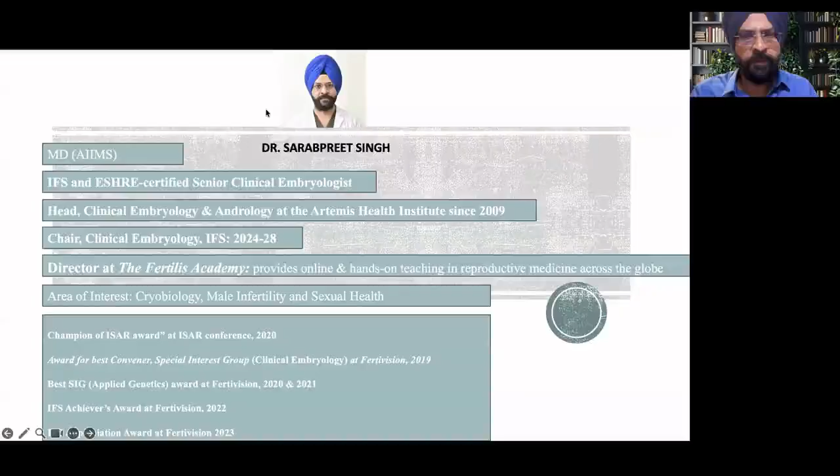To introduce the subject, IVF is a highly complex, multi-step procedure with a cascade of biochemical and molecular intracellular signaling for embryonic development. This outcome is affected by clinical factors such as stimulation, oocyte retrieval, and embryo transfer, as well as environmental factors such as temperature, oxygen, and CO2 control. There is significant change in the microenvironment which affects oocyte and embryonic metabolism and homeostasis, and even a minor change will have a profound effect on embryonic outcome and implantation rates.

The embryo doesn't have a liver, kidney, lungs, or nose to detoxify itself. So you have to feed the embryo with the right kind of nutrients, whether air, macro, or micromolecules. Environmental and air pathogens play a significant role in embryogenesis and implantation. The gametes also require protection from toxic substances such as volatile organic compounds and chemically active compounds.

Sources of air contamination can be either external or internal. External sources include pollution from surrounding areas, nearby buildings, petrol pumps, malls, busy traffic roads, or industry operating near the IVF center, or exhaust from cars and trucks. Those are the main common external contaminants.

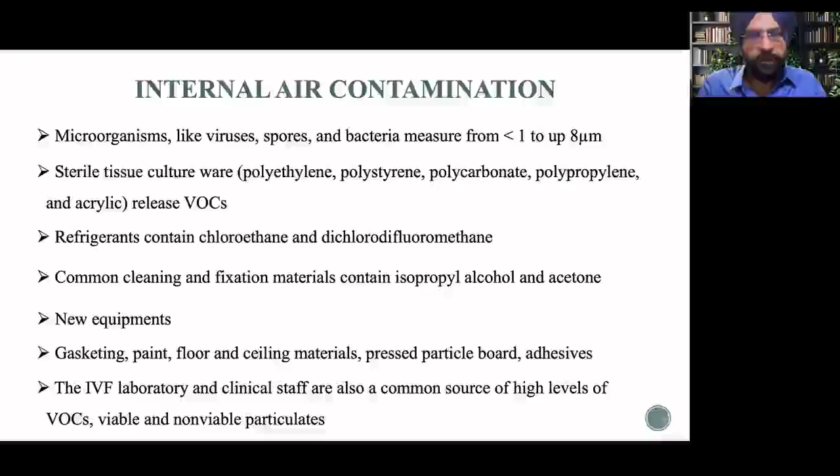Also, the lab staff coming in—clinical staff, nurses, co-embryologists, technical staff—should change into clean scrubs, and should not smoke before coming in or wear perfumes. Everything has to be avoided. Air quality has to be optimal in order to get great results.

If you look at air filtration, there are three different stages. The first is the coarse stage or pre-filter stage, in which pre-filters are usually broad gauge filters which are inexpensive. They filter large particles and provide initial contamination control.

The large particles get stuck to the pre-filters, and thereby the large particles are filtered first, so they cannot impact the fine filters which are subsequently in the series. The first filter is always the pre-filter. The second filter is usually a fine filter which removes fine particles after the big particles are taken care of by the pre-filter. The combination of first and second stage filtration allows filtered air to reach the HEPA filters at an optimal cleanliness grade. The method used to assess the saturation of fine dust filters is by assessing the pressure drop across the filters.

The third stage filtration is usually the HEPA filter, or high efficiency particulate filter, which is responsible for removing the smaller particles. HEPA filters are generally essential for clean room classification, and their saturation is assessed by pressure drop. HEPA filters generally filter particles which are above 0.3 microns.

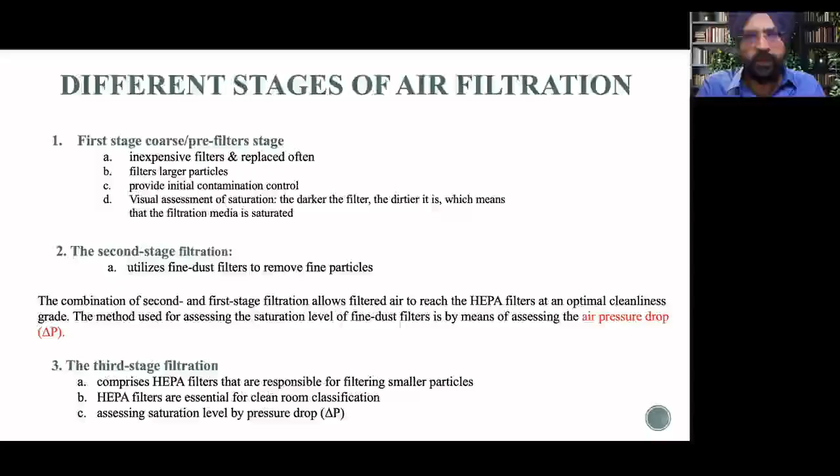Now we'll come into the details of how the filters work. The types of filters are: pre-filters, which filter particles greater than 10 microns; fine and medium filters, which take care of particles more than 1 micron; HEPA filters, which are very effective for any particle greater than 0.3 microns; and ULPA filters, or ultra filters, which filter particles greater than 0.12 microns.

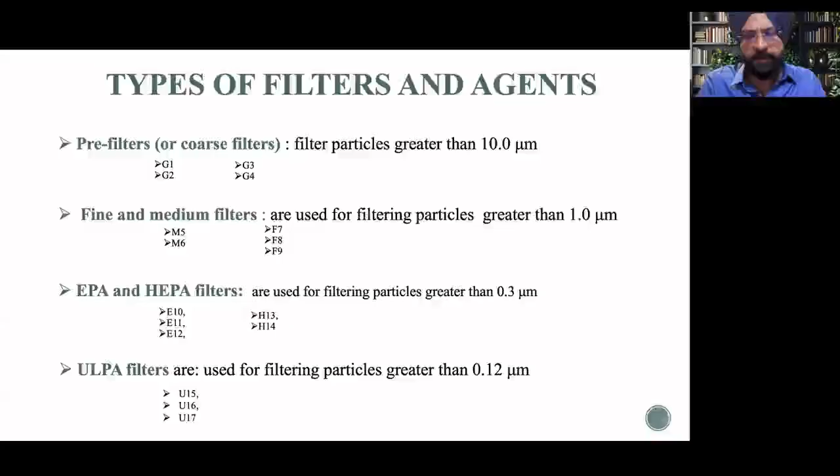So how do HEPA filters work? There are just four mechanisms of particle trapping: diffusion, impaction, interception, and sieving. There's no need to go into the details. Only thing you need to understand is that any particle less than 0.1 micron will get stuck due to diffusion. Any particle more than 0.4 micron will be intercepted and impacted in the substance of the filter material.

The problem is with 0.1 to 0.4 micron particles. These are too large for effective diffusion and too small for inertial impaction and efficient interception, so this decreases the filter's efficiency. The critical range, the 0.3 micron, is the global efficiency point, which represents the hardest particles to capture. Anything less than 0.1 is easily trapped, more than 0.4 is easily trapped, but somewhere in the range of 0.1 to 0.4, especially 0.3 microns, it is the most difficult to trap. And most of the pathogens will be in that range.

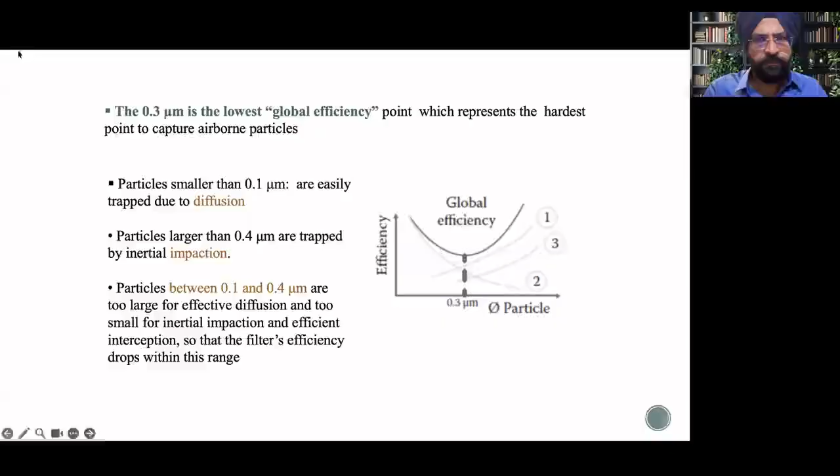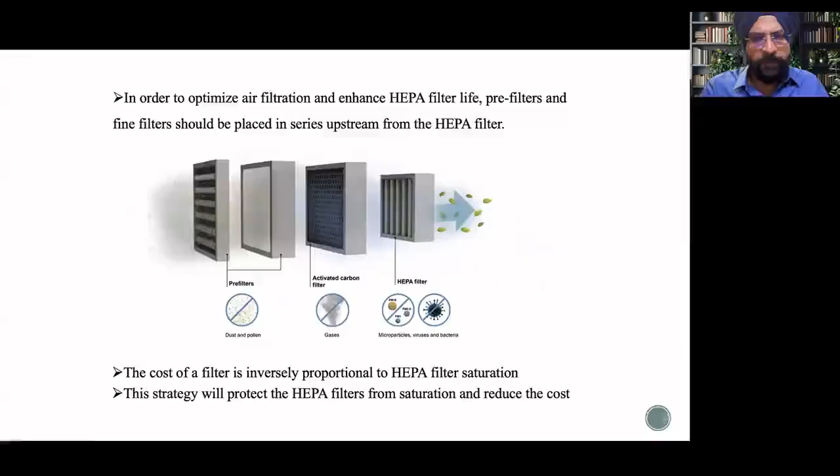If you look at the activated carbon filters, which is the second stage filtration after the pre-filters and fine filters, they generally take care of all the CO2, alcohols, aldehydes — all the volatile organic compounds are taken care of by the activated carbon filters. You also require oxidizing media, which is beneficial in conditions having high aldehyde concentrations. Generally, the oxidizing media is alumina. It acts as a carrier for oxidizing media such as potassium permanganate. It's porous and highly adsorptive, so alumina is something which will absorb VOCs and toxic gases.

These media bind gases which are then chemically broken down by oxidation. For systems that use activated carbon, potassium permanganate reduces the level of oxidation reduction reagents that could also cause problems for culture. So it's a combination filter — usually it has activated carbon as well as potassium permanganate. Potassium permanganate is more of an oxidation agent, and carbon is more of an adsorptive agent for volatile organic compounds.

Another important filtration step is ultraviolet germicidal disinfection. As I told you in the previous slide, HEPA filter efficiency decreases in the critical range of 0.2 to 0.4 microns, and most undesirable microorganisms are in this range, around 0.1 to 0.5 microns. To take care of these, we require additional UV germicidal irradiation. The most effective is the UVC band, which is between 280 to 200 nanometers, achieving the most effective germicidal effect.

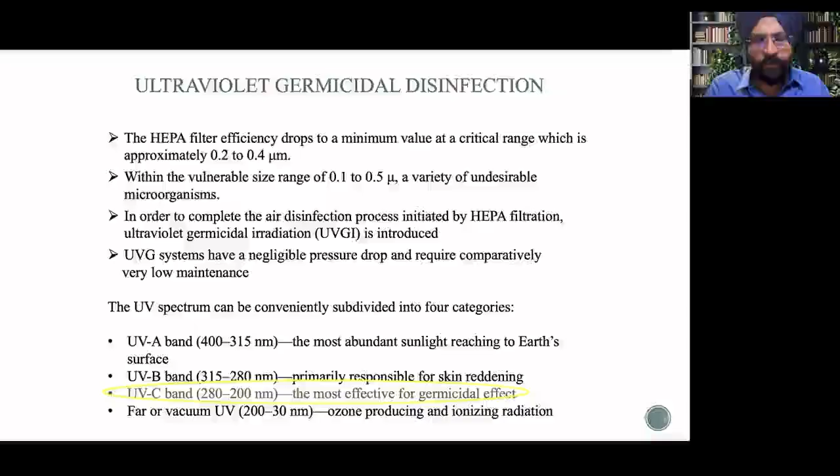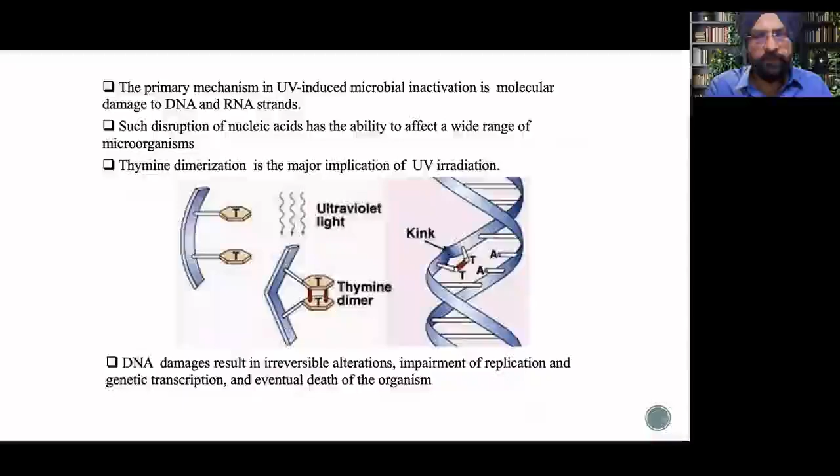So these are part of the filter complex which we generally use. If you look at the primary mechanism by which UV radiation kills or is effective on microorganisms, that is thymine dimerization.

So now the question is, which filter system should you choose for your lab? It depends on the air cleanliness class to be achieved, because there are different classes of cleanliness which we'll go on to discuss in subsequent slides.

Just one second, just one second. I'm joining from the other computer. This computer is giving me some problems. Just one second.

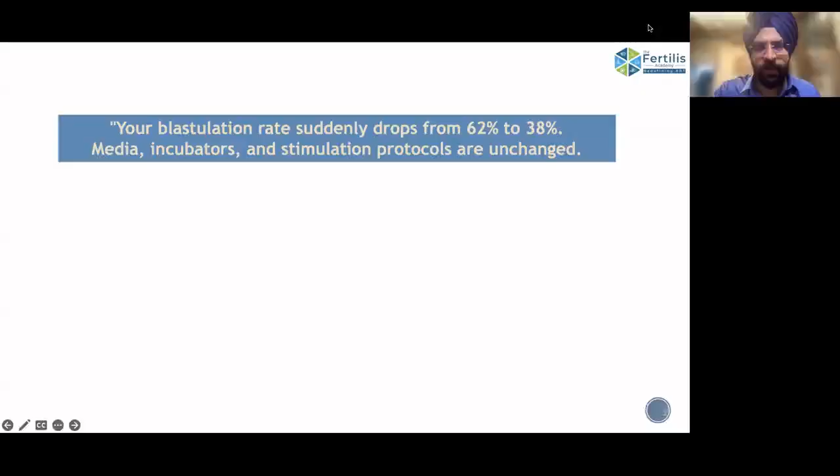So we'll start with a clinical case. Your blastulation rate suddenly drops from 62% to 38%. Everything in the lab is unchanged. So what can be the reason?

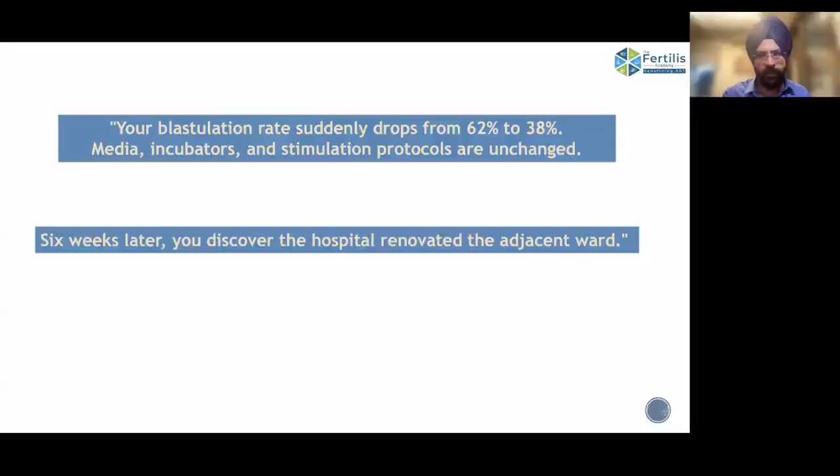And six weeks later, you discover that the hospital has renovated the adjacent ward. There is some construction activity in the adjacent ward, and they have used sealants and adhesives, which can lead to disturbance of air quality in your IVF unit. So the question is, could the air be responsible?

So as we've gone through this slide, IVF is a very complex procedure with clinical and environmental factors, and any small change in the microenvironment will grievously affect embryonic development.

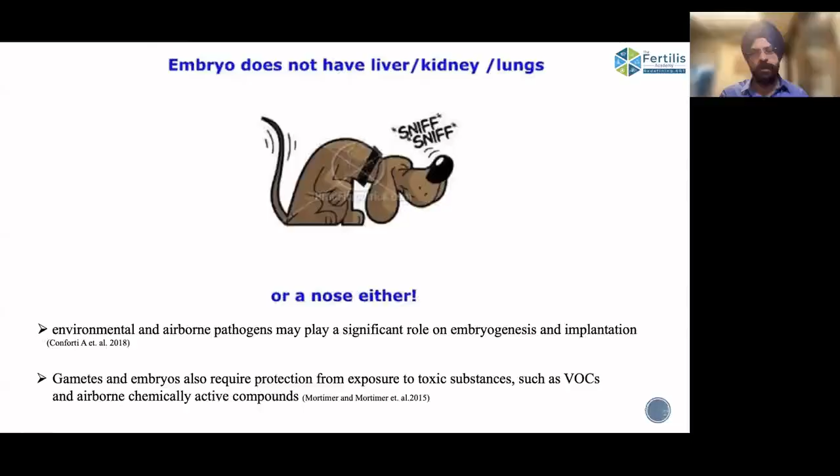With that background, we've also studied that embryos can't detoxify, so you have to give them very pure and quality air. If you look at external sources, there is construction, and pollution sources such as petrol pumps, construction, etc.

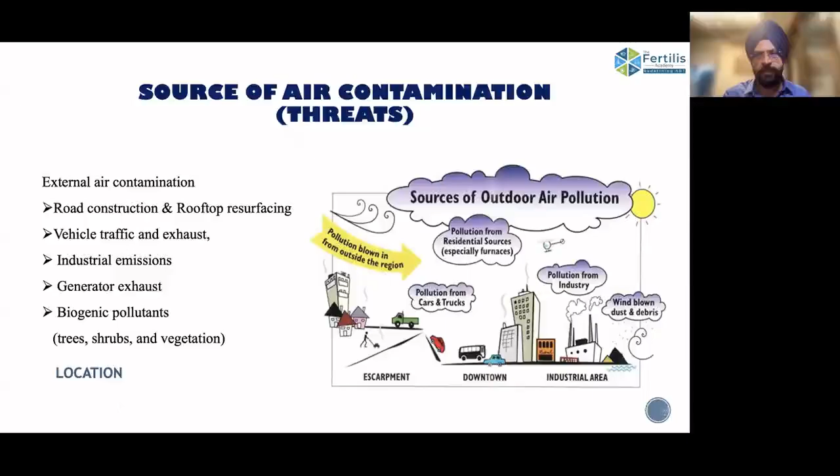If you look at internal sources, these are even more relevant because this is something you can control. People come in with perfumes, hand sanitizers, dirty clothing, plasticware in the lab, paint, adhesives, and equipment such as refrigerants — they do emit VOCs like CFCs, etc.

Any new incubators outgas, as do any new machines. And HVACs — heating, ventilation, and air conditioning units — if not properly maintained, can themselves be a source of poor quality air.

So what is the biological mechanism for damage or decreasing the outcome? Poor quality air will lead to VOC exposure, oxidative stress, mitochondrial dysfunction, DNA damage, and epigenetic alterations in the embryos. This will lead to reduced blastocyst development, lower implantation rates, and reduced live birth rates.

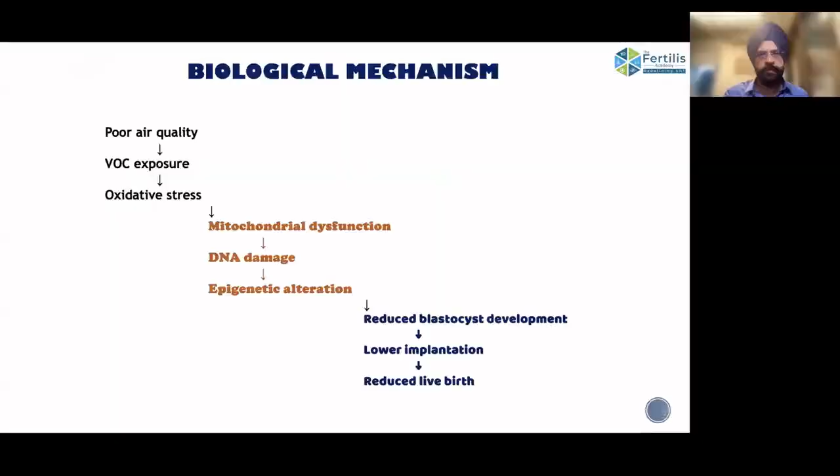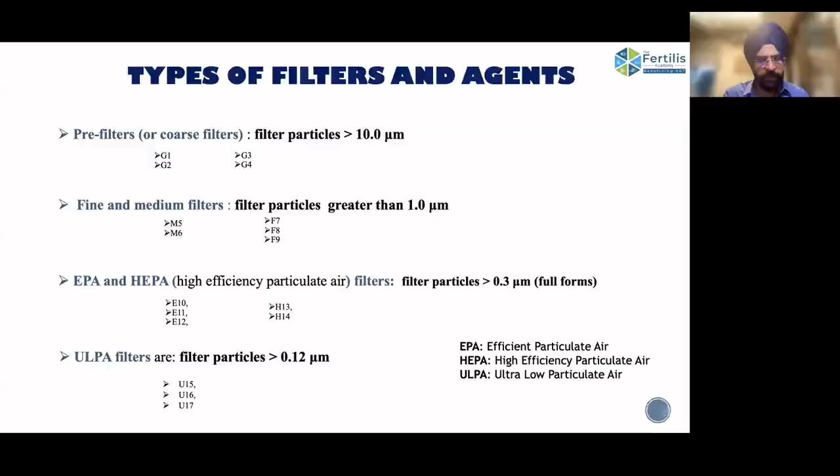This is the mechanism which should be at your fingertips when explaining about air quality. And on air filtration, I told you about the pre-filters, fine filters, efficient particulate air filters, and high efficiency particulate air filters, so we'll not go over it again.

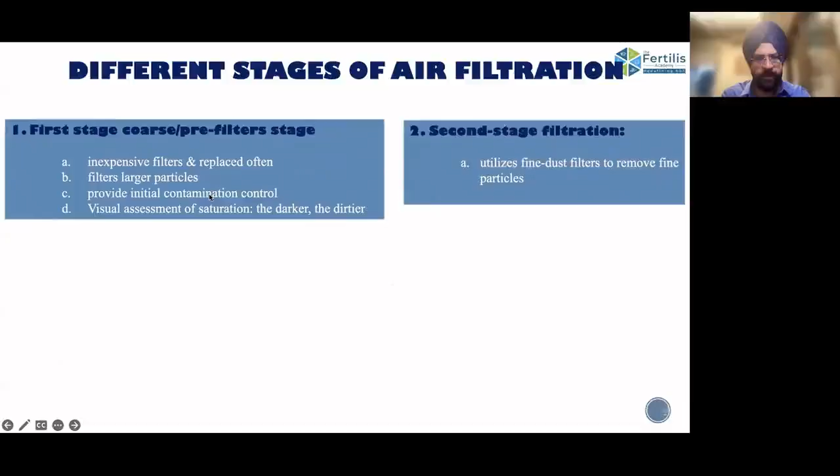You know the different stages: the first stage is only the pre-filter stage, the second stage is the fine filter stage, and the third filter is the HEPA filter stage. We have to take care of providing filtered air to the HEPA filter, because otherwise the HEPA filter will get impacted and jammed.

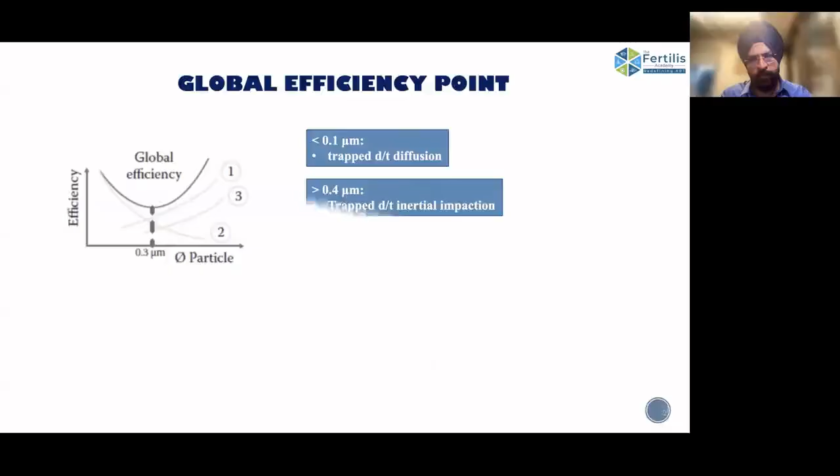So the four mechanisms of particle trapping are diffusion, inertial impaction, interception, and sieving, as we told you. And for global efficiency, you know it's between 0.1 to 0.4 microns, with 0.3 being the mean. Anything less than 0.1 is trapped, and anything more than 0.4 is again trapped. Anything between 0.1 to 0.4 is critical and it's difficult to intercept.

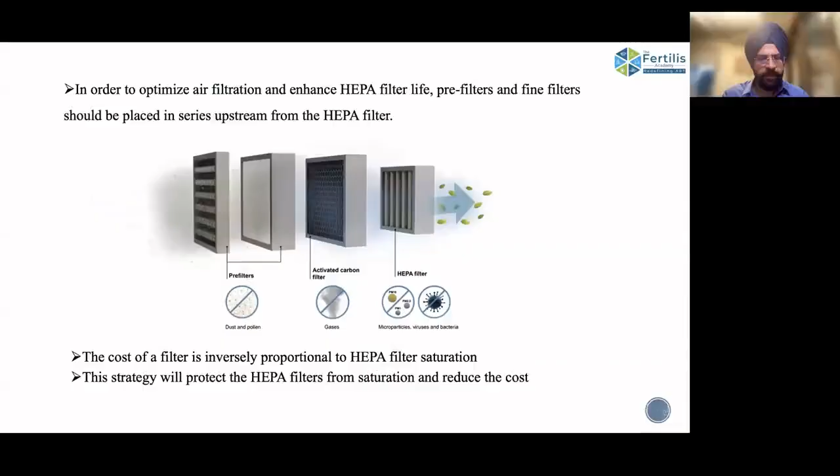So the series of filters is pre-filter, activated carbon, and HEPA filter. Looking at the activated carbon filter, the size and type of filters should be designed for IVF labs with air volume providing sufficient turnover rate and exposure time to the carbon filter to remove VOCs from the room air.

So oxidizing media, as I told you, takes care of the high aldehyde concentration in the environment. Alumina generally acts as a carrier for oxidizing agents — it's porous and highly absorptive, and it binds gases.

For systems that use activated carbon, KMnO4 or potassium permanganate reduces the level of oxidation-reduction reagents, which could be a problem for cultures. So they are used in combination — activated carbon and KMnO4.

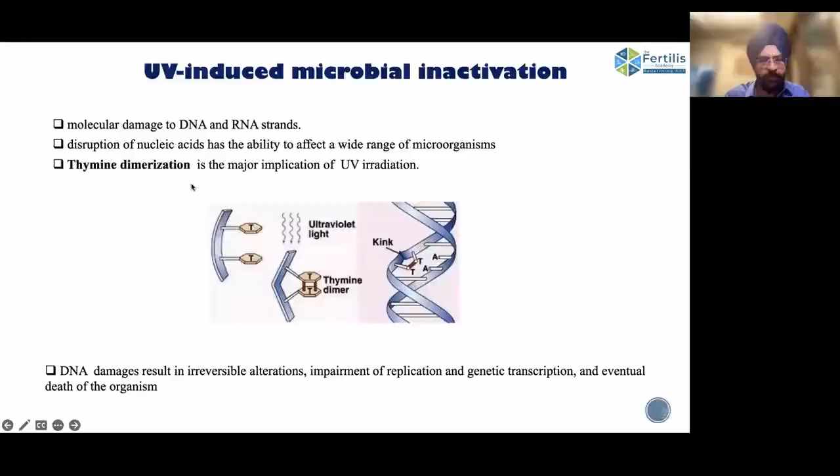Looking at ultraviolet germicidal disinfection, I told you that the UVC band is the most effective for germicidal effect, and generally thymine dimerization is the major implication of UV radiation, which kills the microorganisms.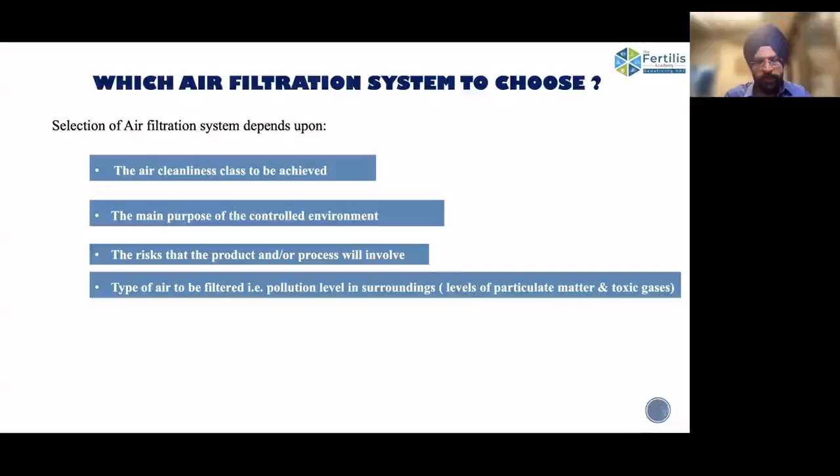Now, which air filter to choose? It depends on what kind of air quality you are trying to achieve, the main purpose of the controlled environment, the risk that the product or process will involve, the type of air to be filtered - that is, it depends on the pollution level in the surroundings. Also, the size and type of filters should be designed in proportion to the lab air volume.

This provides sufficient turnover rate and exposure time to the carbon filter so that it can easily remove the VOCs from the room air. The most critical and silent killers are the VOCs, or volatile organic compounds. Particulates you will take care of with the help of HEPA filters.

Also, the budget which is to be invested in air filtration has to be considered, because there are many kinds of air filtration systems which we will discuss in subsequent slides, and the cost is also a major concern.

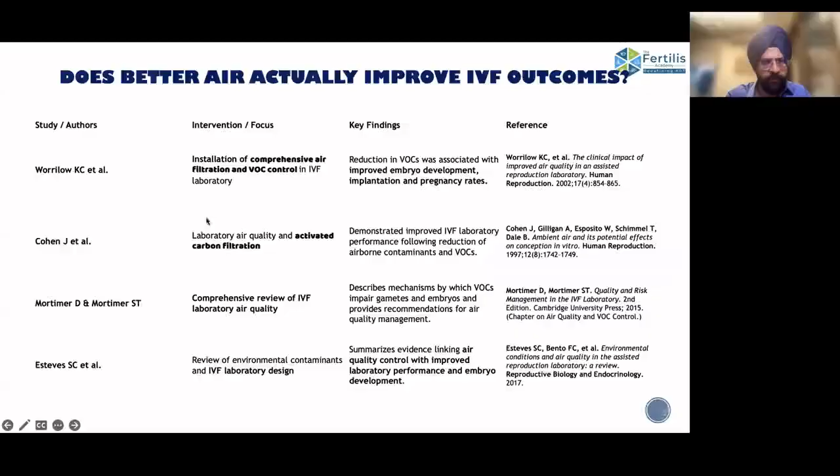Many studies have shown that if you improve the air quality, the implantation rates and the embryo development improves. These are some of them. You can take a picture of this, you can take a screenshot.

So what are the benchmarks for an IVF lab in terms of air quality? The benchmark is there should not be more than 3.5 lakh 0.5 to 5 micron particles. This condition applies during operation as well as during rest. So the air quality should be grade B in operation and grade C at rest.

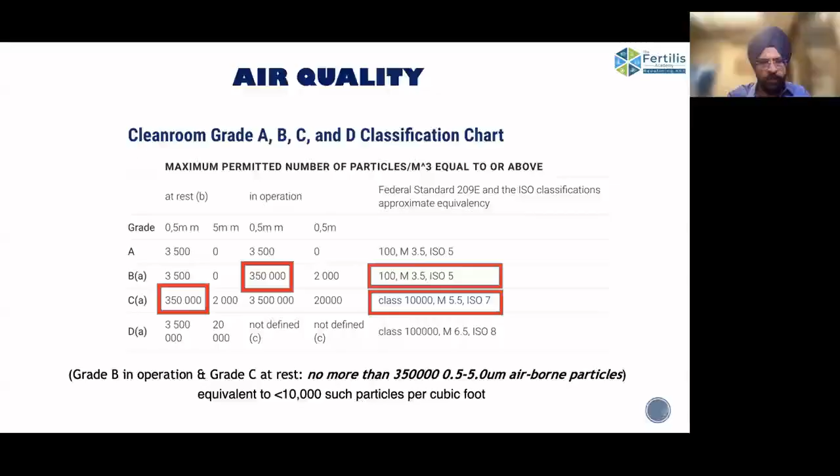So anything which is class 10,000 in the ambient environment will be able to support class 100 in the laminar hood. If your ambient air is not clear and good, you will never be able to achieve the right air quality in the laminar hood. So keep your lab clean. Don't trust your laminar hoods in case you're not feeding them with the correct air.

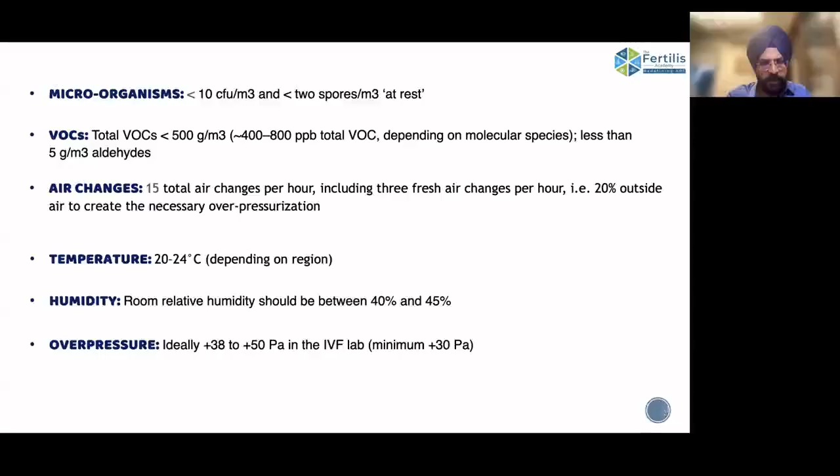So the international norms for microorganisms should be less than 10 colony forming units. VOCs should be less than 500 grams per meter cube. Air changes at least 15 to 20 per hour, with at least 20% outside air, which is required for necessary overpressurization. Temperature 20 to 24 degrees depending on the region. Humidity should be maintained between 40 to 45%. And overpressure of at least 38 to 50 pascals, minimum 30 pascals.

But honestly, we have tried using 30 pascals - it becomes too much. Anything between 10 to 15 is a more practical solution. This is my own experience in my lab.

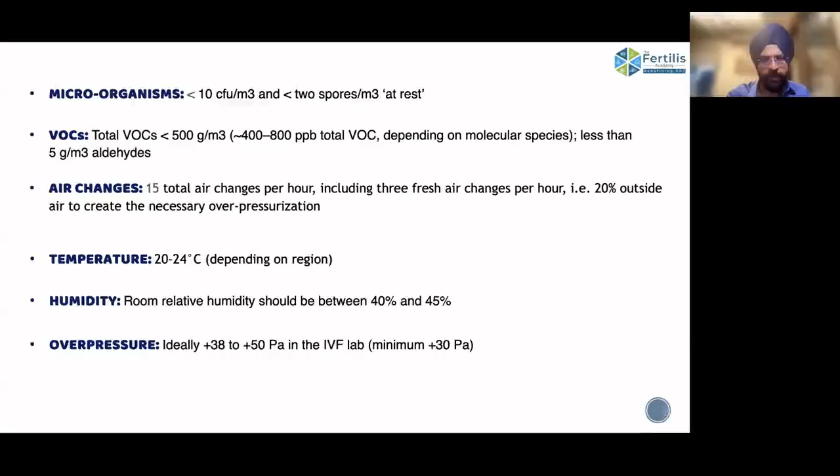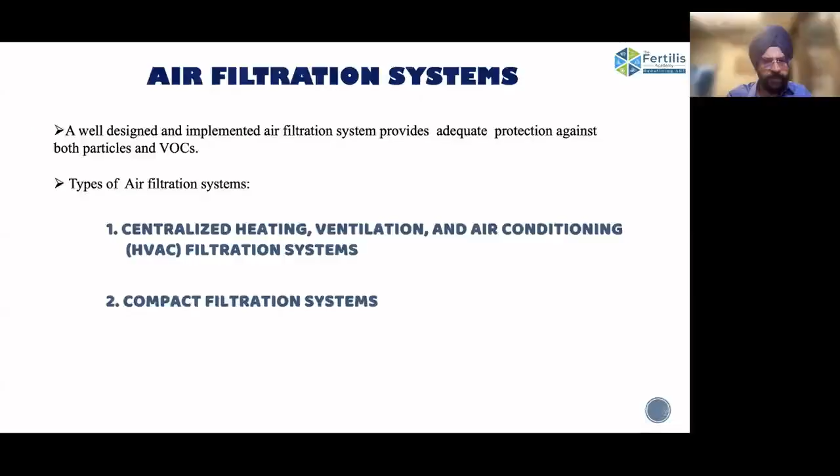And we can achieve all this with the help of different air filtration systems. Number one being centralized heating, ventilation and air conditioning systems, or HVAC units - most expensive and most efficient. Then we've got the compact filtration systems. And we have got portable filtration systems, like they are similar to what we use in our homes in North India because of high pollution in winters.

So we will be discussing all the filtration systems. The HVAC systems combine adequate supplies of pressurized airflow with temperature and humidity control. So this is the chief feature: pressure control, temperature control, humidity control.

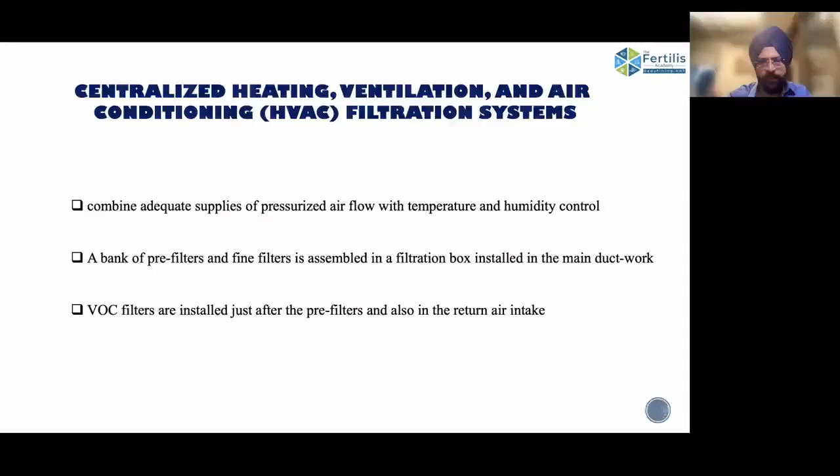There is a series of pre-filters and fine filters in a filtration box. The VOC filters are installed next to the pre-filters, and then the activated carbon filters and KMnO4 filters which take care of VOCs. And at the last, you have the HEPA filters.

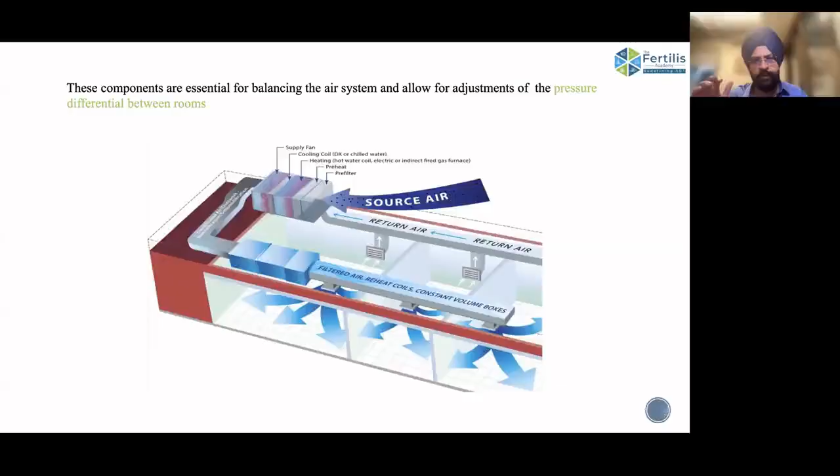And for each room, you require different HVACs at different pressure settings. So if you have a higher pressure HVAC in the lab, you should have a lower pressure HVAC in the OT, so that the air flows from lab to OT, and the OT should be a little higher compared to outside. Then the airflow is from lab, to OT, to outside.

Now talking about the compact filtration systems, they are known as bag-in and bag-out filtration systems. They are ideal for low budget facilities with a maximum room size of 20 meters square, around 200 to 230 square feet.

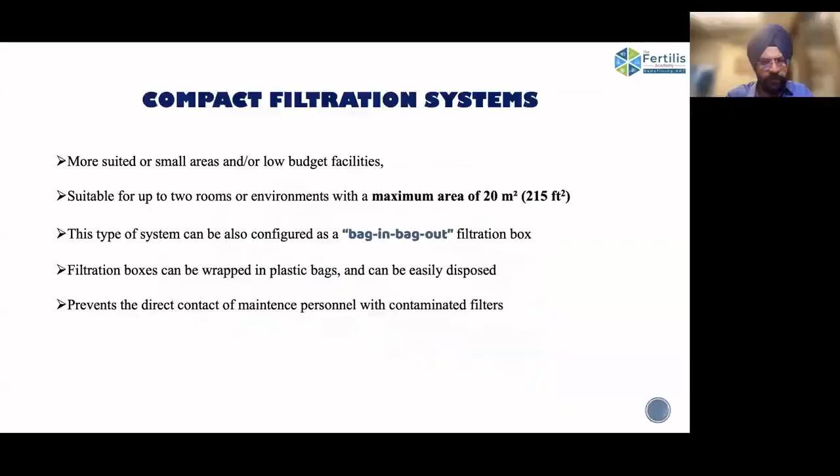If you look at these filter systems, they are usually installed in the adjacent room, and they throw in clean filtered air into the IVF lab. The filter box is a combination of pre-filters, HEPA filters, and most filter boxes will also have activated carbon filters. They provide high filtration rates and high speed airflow, decent temperature and humidity control, but the pressure differential they claim to provide is not as effective as the HVAC system.

Now this is a very common example of what we get in our country. This is a lab guard. If you look at the design, the lab guard is throwing in filtered air. This is the room next to the IVF unit, and this is the IVF unit. The lab guard will throw in filtered air which circulates in the IVF lab, and through a return blower, this comes back to the adjacent utility room.

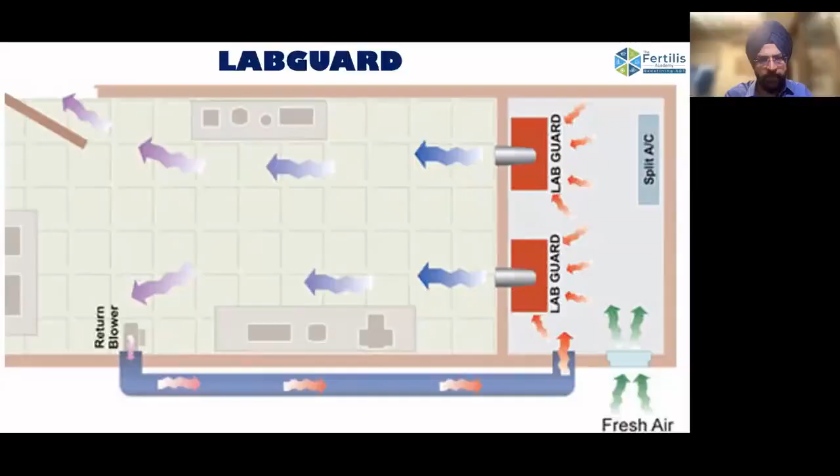The important feature which people generally miss is that there is a supply of fresh air which is absolutely essential to detoxify the air. Otherwise recirculation will go on pumping in contaminated air. The split AC is usually installed in the utility room or adjacent room, because the cold unfiltered air goes in through the lab guard, and it not only cools the IVF unit, it also provides filtered air at a slightly higher pressure compared to normal. A reasonable arrangement to get decent results.

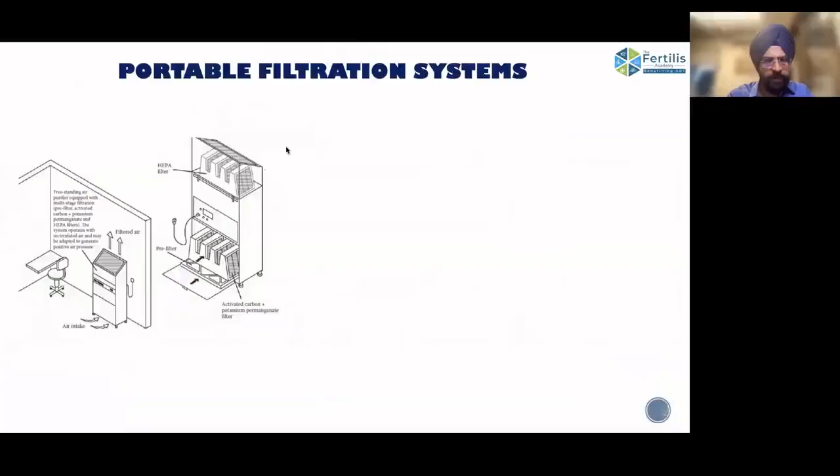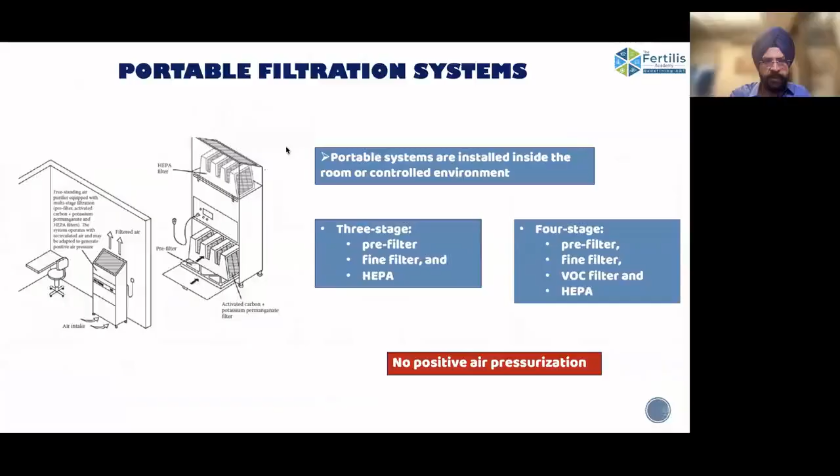If you look at the portable filtration system, they are more or less what we use in our homes. This is again either a three-stage system of pre-filter, fine filter, HEPA filter, or it can be four-stage: pre-filter, fine filter, carbon filter, and HEPA filter. There is no positive pressurization, it just goes on recirculating air, and at some point the filters will clog and you have to replace them.

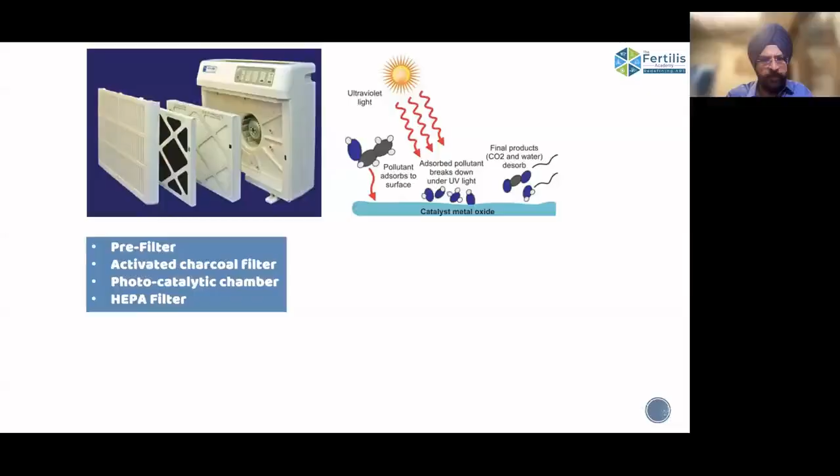This is another example of a portable system, Zandair or Coda filter, whatever you may call it. Same kind of arrangement, so we are not discussing this again. No temperature or humidity control, no pressurization.

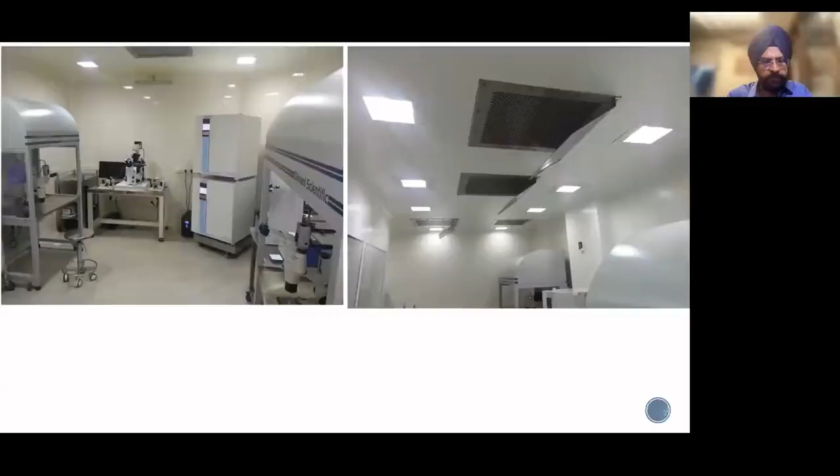This is an example of a lab in which there is a centrally placed HEPA filter through which air is entering into the lab. And this is kind of a correct arrangement.

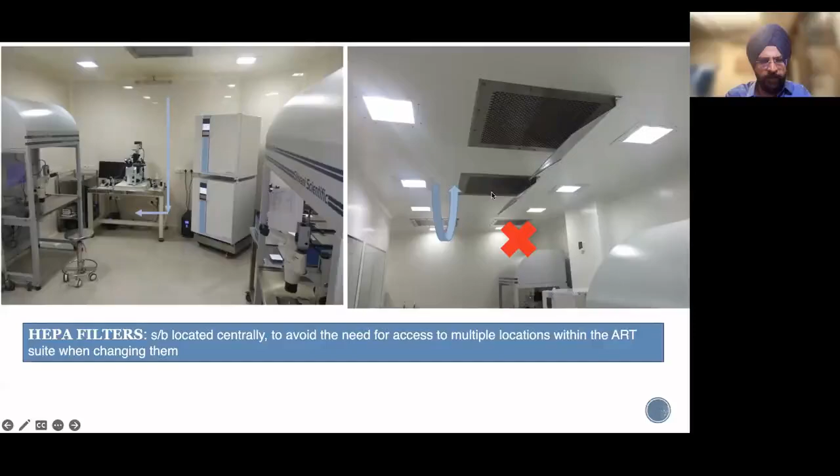If you look at this lab, it has got various HEPA filters, maybe three HEPA filters in the same lab, which will be difficult for achieving the right pressurization in such an arrangement. Moreover, the cold filtered air will fall on the instruments if you have multiple vents in the lab, and it will disturb the conditions of the incubators. So placement of HEPA filters should be central and not multiple locations, because it will create cold spots and hot spots in the lab, and especially the inlet and outlet should be nicely located.

Look at this lab. The inlet is from the top and the outlet is at the walls. Whereas in this lab, the inlet is on top, as well as the return duct is again on the ceiling, so the circulation is not laminar in any way.

So when we talk about clean rooms and air quality, it should be pressurized using HEPA filtration, airtight ceilings. Everything should be airtight, and there should be a positive pressure which is maintained. No wood, only stainless steel furniture. Constant temperature and humidity should be maintained. This is an example of a unit which records pressure across two different rooms, and this should always be positive, with the pressure always higher in the IVF lab.

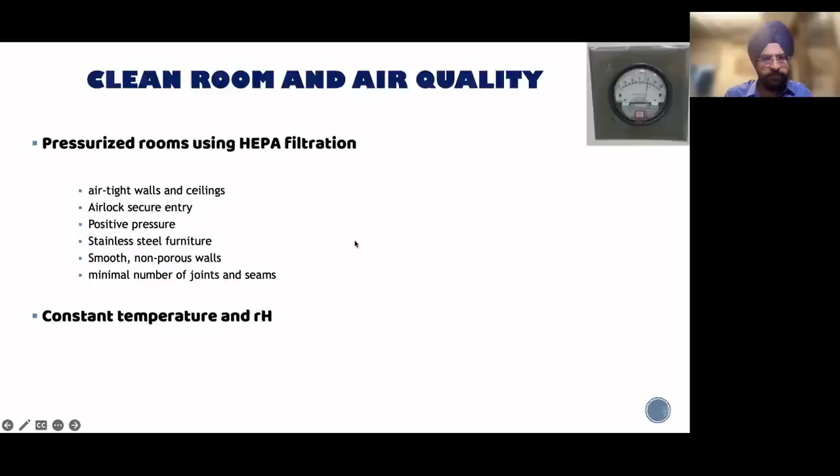In my practice, I've seen that the communication between the IVF lab and IVF OT is very important. Any leakage from the communication between lab and OT is a function of the square of the radius of all open holes, that is the total area of all the holes. So if there is a small opening, there will be a huge degree of pressure leak, and the pressure will never be maintained in such labs.

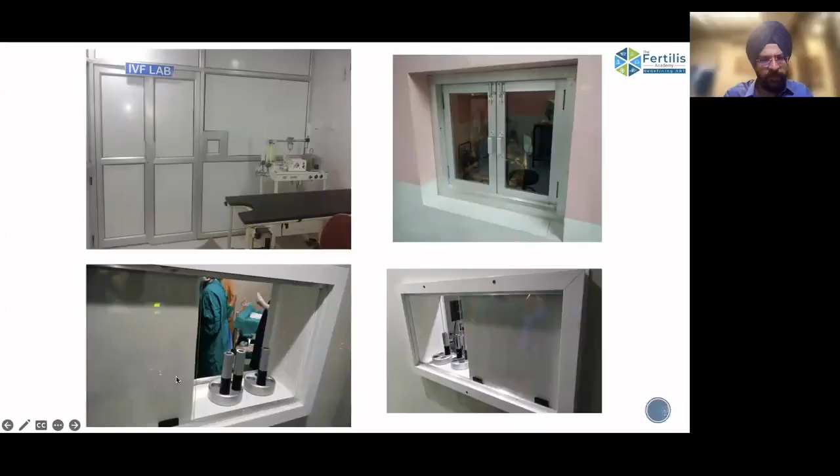Many times we see sliding doors with small hatch boxes. Look at this lab, which has got very normal kind of glass windows. These are unable to maintain the pressure differential between two rooms.

Whereas something like this is a pass window, and this is quite effective in cutting off the air so any leakage is prevented between the two rooms, the lab and the OT. The best arrangement is this pass-through window, which is not very expensive. It is double gasketed, and when you close it, it nicely maintains the pressure differential between the two rooms. So simple things bring in good results.

Any sliding door effectively seals, and there is no pressure leak between the two rooms.

If you look at the airborne pathogens, volatile organic compounds are the silent killers, and they are associated with compromised embryonic development. They harm sperm quality by attaching to the DNA, causing DNA fragmentation and harming the embryos, especially in the later stages of development. And they also react with indoor ozone and release toxic and mutagenic substances.

Sources of volatile organic compounds include construction material, PVC flooring, plastic dishes used in the lab, paints, adhesives, cleaning agents, perfume, smoke, and sanitizers. I would like to reiterate that as low as 2.2 parts per billion is also embryotoxic.

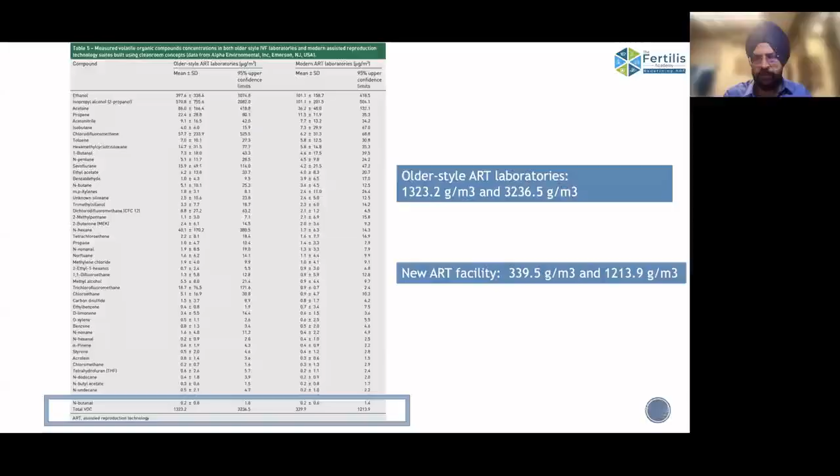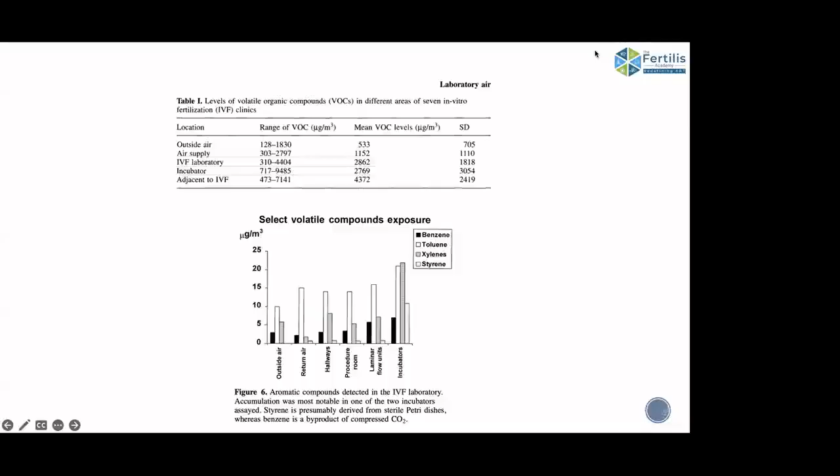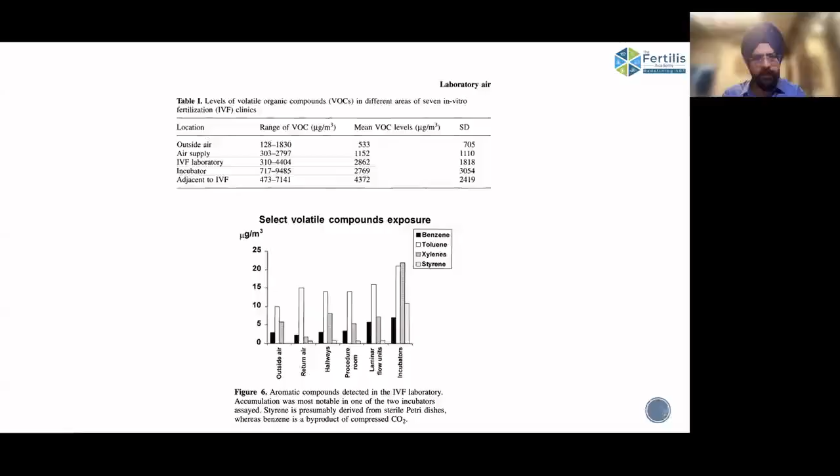With ineffective filtration, the VOCs start accumulating in the IVF lab, and the maximum VOCs have been found in the incubator also. So you have to take care of your incubators. You have to detoxify them, decontaminate them, and then the results will be maintained at an optimal level. New equipment has to be run in order to dissipate latent VOCs which are produced during manufacturing and packaging.

VOCs have multiple classes. It's impossible to measure all the VOCs, as there are so many different classes. So no one particular instrument can measure VOCs. It is always better to follow the right practices, practices in which the VOCs are reduced to a minimum and are unable to impact the IVF results.

The most common mechanisms for VOC remediation are adsorption, photocatalytic oxidation, molecular sieve, and oxidation. We have covered these in the previous slides, but we're just revising them.

Activated carbon and potassium permanganate filters are the most common technique for purification of VOCs because they allow the VOCs to diffuse within their matrix and trap them there.

Alumina is not only a carrier but also takes care of the oxidation reactions. Any modifications done in alumina by adding chemical materials widen the application. It can then also remove sulfur dioxide and polar organic compounds.

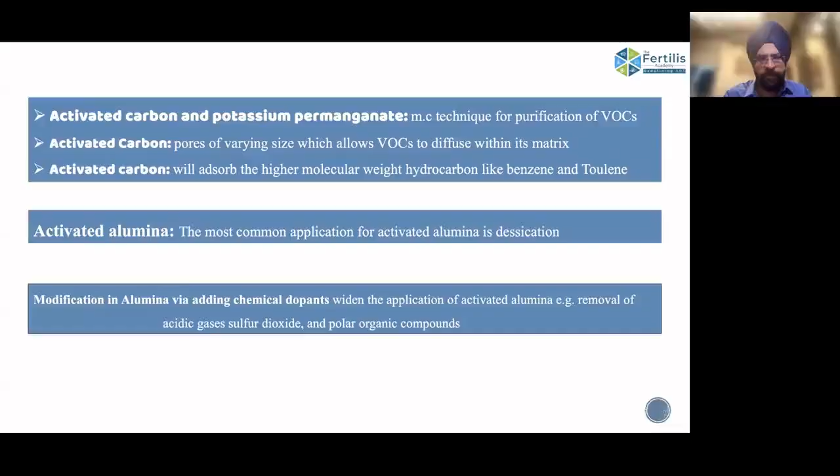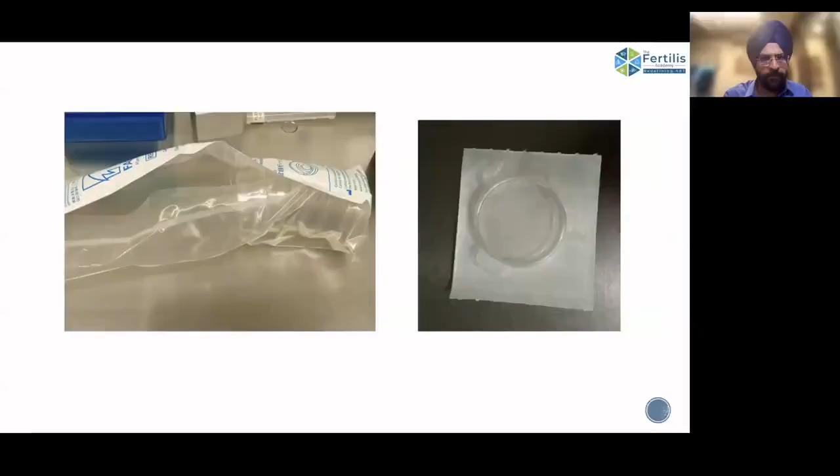Always choose the right dishes. When you bring in dishes, allow them to settle outside the lab. There should be a package, there should be a storage room. Let them degas. And when you bring it into the lab, this breathable packing should just be opened wide and left loose, so the VOCs will be dissipated.

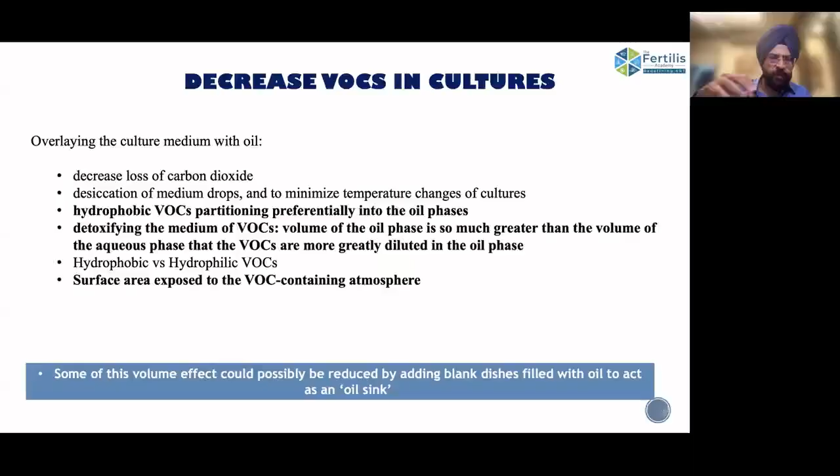Also, you have to use oil liberally in the culture systems because oils not only absorb the VOCs, but they also prevent the VOCs from reacting with the media phase of the culture media, thereby preventing any VOCs from reaching the embryos and harming them. So you should always have a liberal amount of oil over the media drops.

This is known as oil sink, in which the oil will absorb the VOCs, and it is a good practice to keep oil in 100 millimeter dishes in the box incubator. It also absorbs the VOCs and keeps the incubator conditions very neat and clean.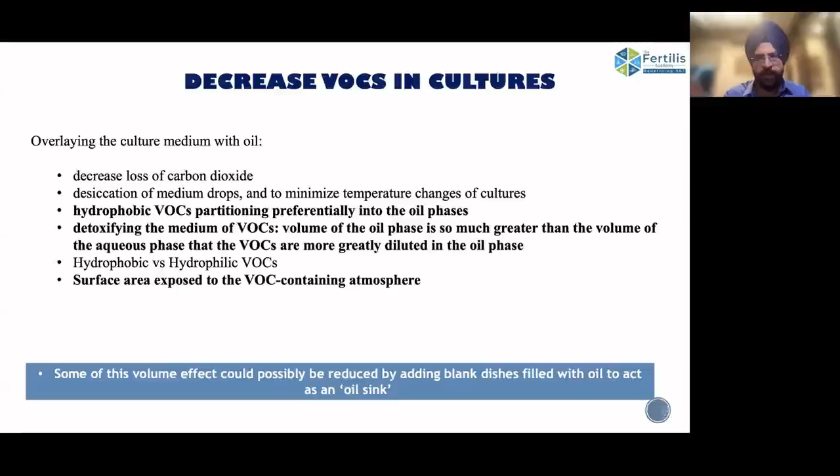Also, one other thing you can use in your labs is activated carbon, which you can procure from Amazon or from Eureka Forbes. You can spread it in steel plates and keep it in the lab. It absorbs VOCs for at least 3 to 4 days, and then it needs to be replaced.

Any new facility has to be deep cleaned and then utilized. For regular cleaning, even people were using 70% alcohol, which is not recommended nowadays. You should use either quaternary ammonium compounds, or if you can't source it, 6% hydrogen peroxide is also a good idea. Everything has to be alcohol free, and aldehyde based cold sterilizers, sanitizers, and cleaning agents with chlorine dioxide are a strict no.

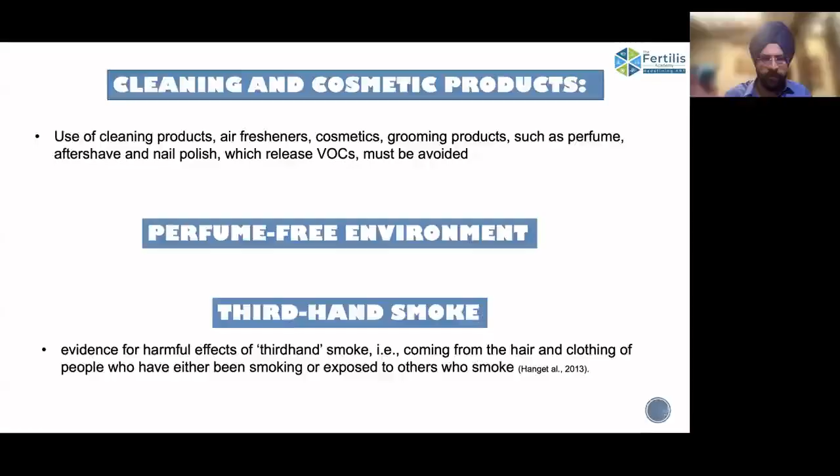Cleaning and cosmetic products, as I told you, should be quaternary ammonium, no perfumes, no third hand smoke. Nobody should be smoking and coming in the lab. Nobody should be drinking and coming in the lab. Operators are the biggest source of VOCs.

So minimal traffic in your IVF labs, clean scrubs and PPE equipment. Try not to keep computers and accessories in the lab. Even if you have to keep computers, try using laptops and not desktops. No photocopier, no printer in the lab.

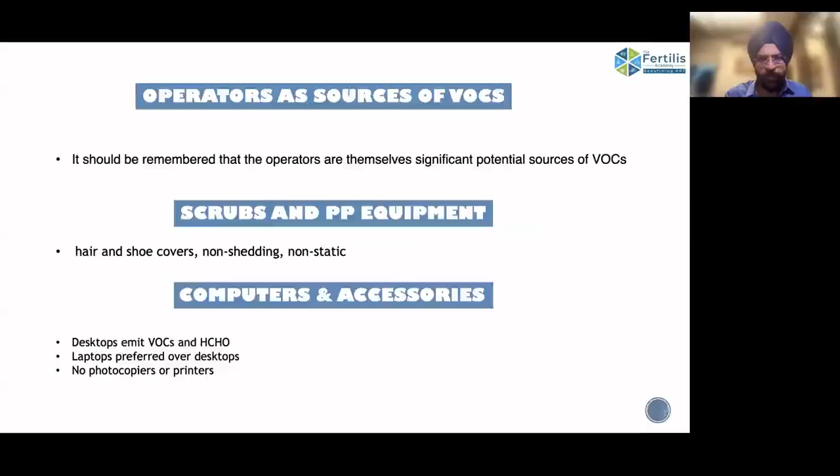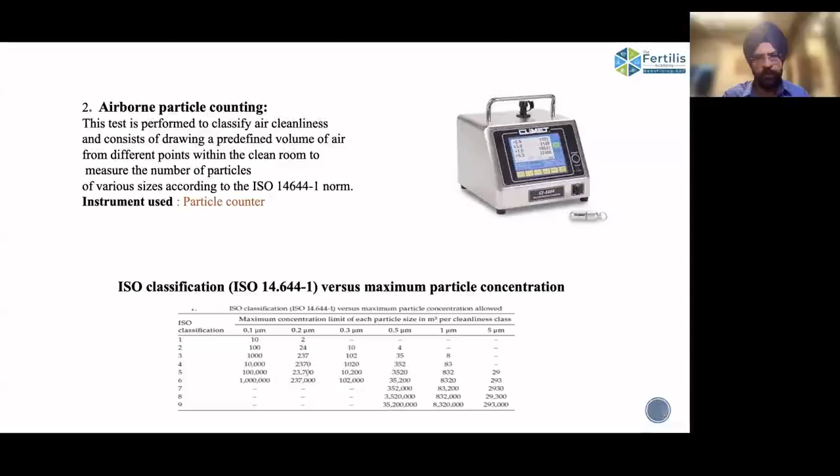Also, you should be counting the particles. As I told you, the particle count for 0.5 to 5 micron particles should always be less than 3.5 lakh particles per meter cube. So take the help of a particle counter, and outsource it to a good reliable lab.

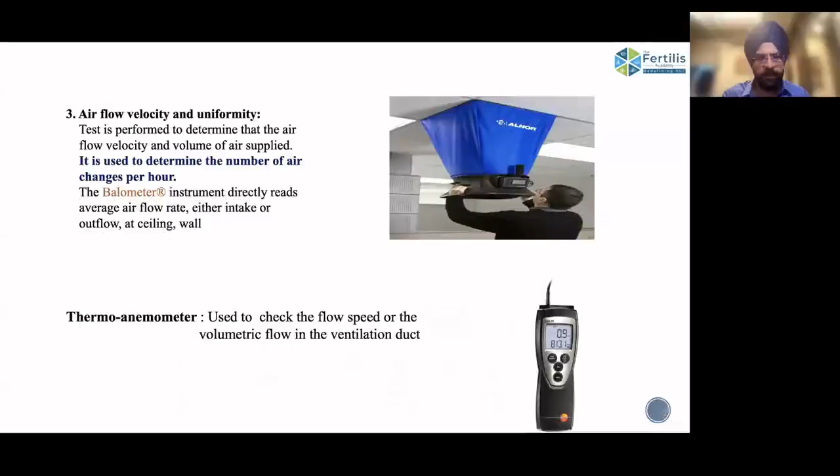You can measure the number of air changes and air velocity and uniformity with the help of balometer devices, and even anemometer helps in detecting the flow speed in the ventilation ducts.

This is a little technical, but again, something which you can do every day. You can at least check the pressure differential between the IVF lab and IVF OT. You can do it simply with a crude test using paper strips and seeing where they are being blown, whether in the lab or outside in the OT. If the pressure is high in the lab, the paper strips will go towards the OT.

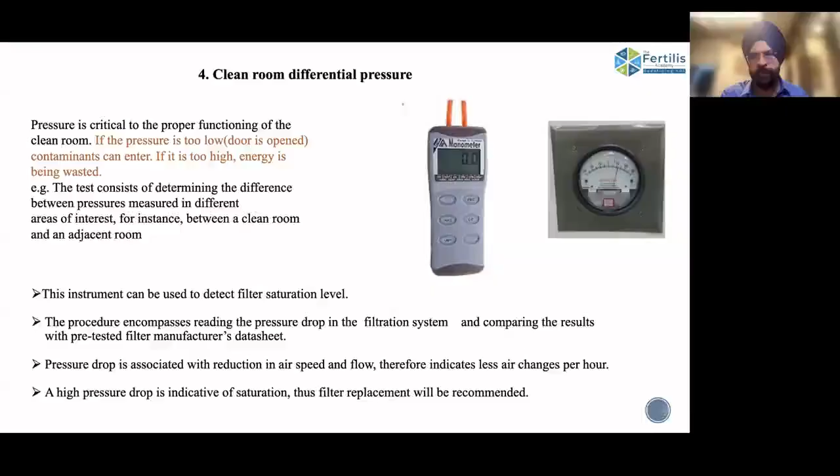Also, most of the advanced facilities have pressure differential meters, which will show readings in the range of 10 to 30 pascals. So these are important things which you have to notice right early in the morning. You have to come and see whether the pressure is right, whether the machines are working fine, and check the relative humidity and temperature. These are very reasonably priced devices which you can order from online portals.

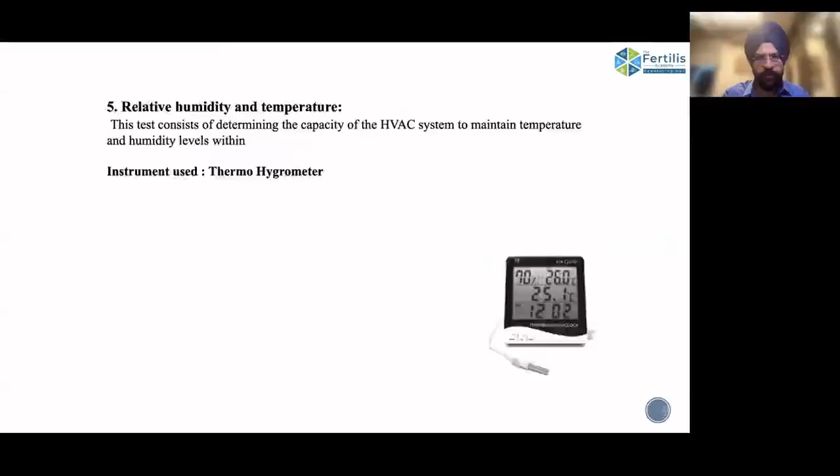So the instrument is a thermohygrometer. It shows temperature and humidity, what percentage humidity is in the lab. Very important, useful instrument. So nowadays things are changing.

Now we have got AI coming in. AI has not left IVF far behind, so we are definitely using AI. With the new AI workflow, there are sensors installed which send information to a cloud database, and with the help of AI, a pattern is recognized, a risk is predicted, and recommendations are sent to embryologists. This is the time of AI, and you can't be left behind. The more information you feed into AI, there is continuous learning, early prediction, reduced human error, and it improves your lab consistency.

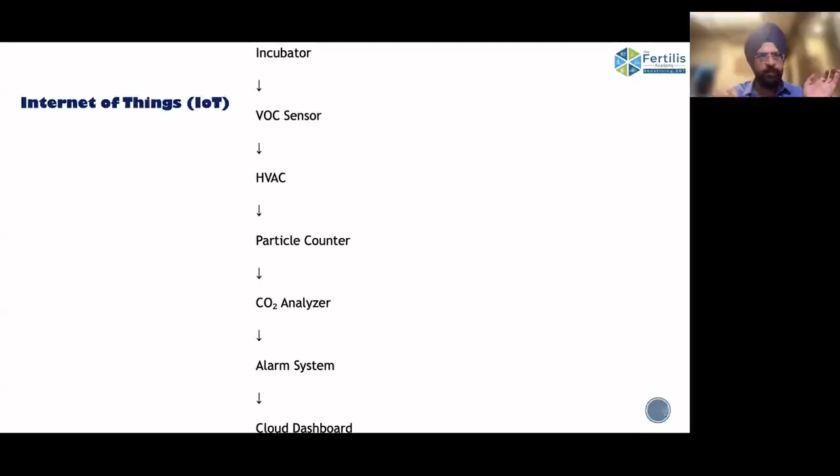Also, there is a thing known as the Internet of Things, in which all the lab instruments, all the macro environment and micro environment, are integrated with the help of internet. So anything which goes wrong in the incubator, or something wrong in VOC, HVAC, particle counter, CO2 analyzer, everything is relayed to a cloud dashboard, and corrective action is taken with the help of artificial intelligence. So the lab becomes one intelligent ecosystem with the help of IoT.

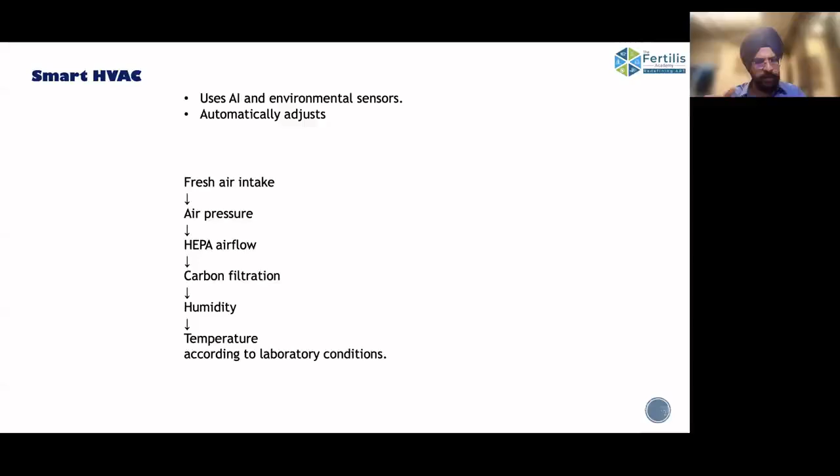Now this has given rise to the term known as smart HVAC. We are using HVACs where you manually detect whether anything is wrong and adjust it. Nowadays, you have got HVACs which are smart, with sensors that automatically adjust their performance. So if there's a fire in the neighborhood, it will quickly detect it, and before you reach, the HVAC has taken the corrective action. Now things are shifting towards predictive maintenance, AI integration and smart labs, which analyze data and then modify fan speed and energy consumption, and prevent VOC breakthrough.

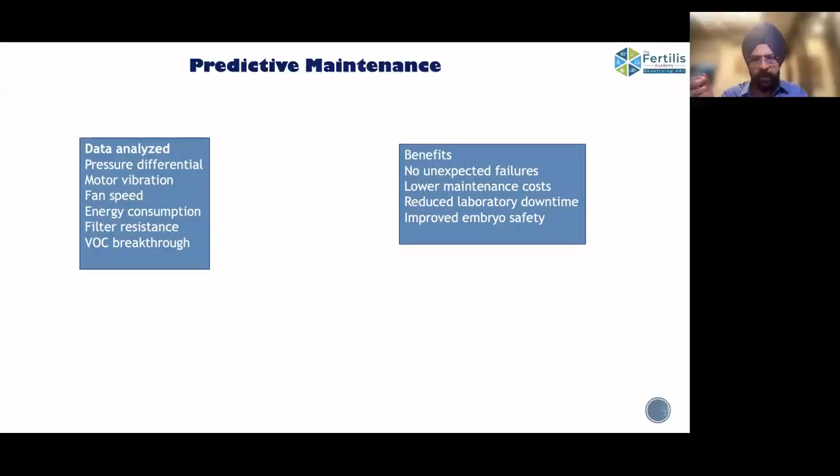So the benefits are there are no unexpected failures, maintenance cost goes down, there is reduced lab downtime, and embryonic safety is enhanced.

So the future smart lab is something which is not reactive, like detecting some changes and reacting to it in my HVAC system. But now it is predictive.

With the help of AI, digital twin labs have come in which, with the help of AI, you can quickly detect that something is going wrong, and predictive analysis is done. Even you know that my filter is going to be exhausted in the next 2 weeks, and AI will give automatic recommendations.

So times are changing, and to give the best and possible chance to our patients and to our embryos, we have to integrate these technologies in our lab in times to come. Because manually, it is not only difficult, it's next to impossible to have a person monitoring everything 24/7.

So with this, I would say that culture media is only one component of embryo culture. The true culture medium is the entire lab environment, and the embryo spends 5 to 6 days in our lab, but those 5 to 6 days determine an entire lifetime. Every breath the embryo takes matters. So you have to feed in the most pure and most clean air to the embryo because it cannot detoxify. It has got nothing to detoxify things.

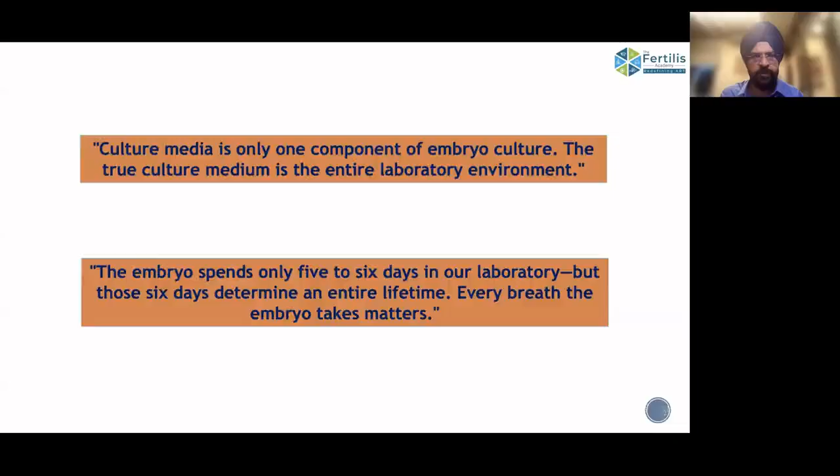With this, I end my presentation. I'm sorry for the little inconvenience because of the computer malfunction. So if there are any questions, I'll be happy to answer.

Dr. Lakshmi, are you there?